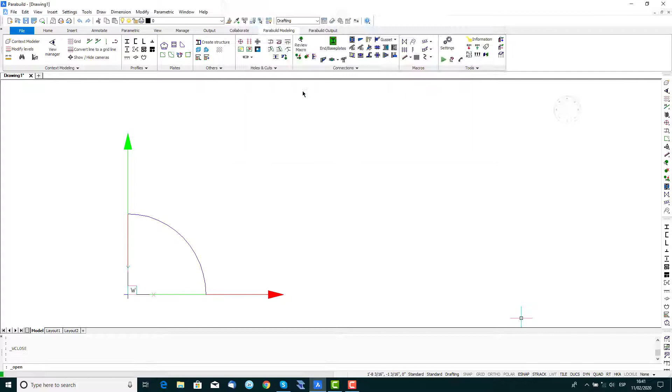In this exercise, we'll take a closer look at drawing, modifying and copying of larger macros such as bracings and trusses. Click on the Smart Copy icon and select one of the vertical bracing macros. When done, press Enter to confirm.

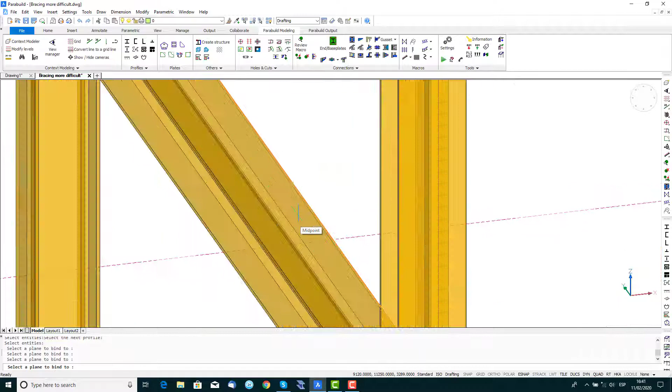Then, following the command line prompts, select two columns on the y-axis of the building, ensuring that one is a corner column. Then zoom in and select the top plane of the beam spanning between the columns by moving and clicking the mouse cursor until the plane is highlighted. When done, press Enter to accept the plane selection.

The bracing wasn't copied because the orientation of the two columns are rotated at 90 degrees relative to each other. To accommodate this situation, we need to redraw the bracing. Press the Escape key to cancel the Smart Copy command and click on the bracing icon. From the selection window, double-click Angles, opening the Fixing the Bracing dialog.

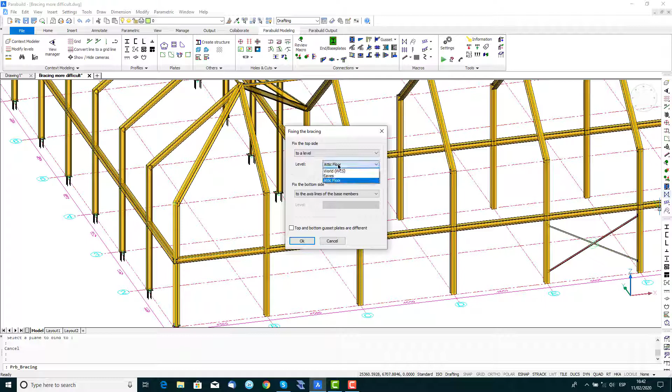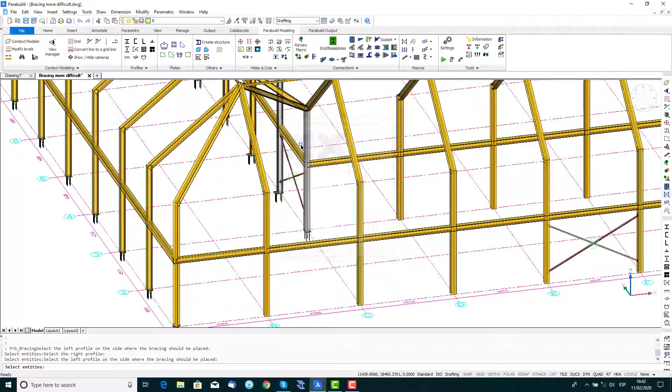And from the Fix the Topside drop-down, select To a Level, and then set the level to Attic Floor and click OK. Then, following the command line prompts, select the same two columns as before, first the left and then the right. From the gusset plate options, double-click on Rectangular Gusset Plate, and for the middle connection, double-click on Bolt and press Enter to confirm. Then close all the open dialogues.

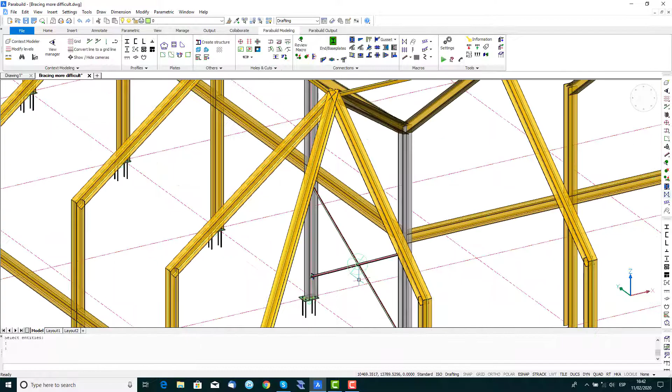Parabuild has automatically recognized that the two columns are orientated differently and has placed one set of gusset plates on the flange of the column and the other on the web. This is why the Smart Copy command for the other bracing didn't work. We'll now look at another bracing configuration.

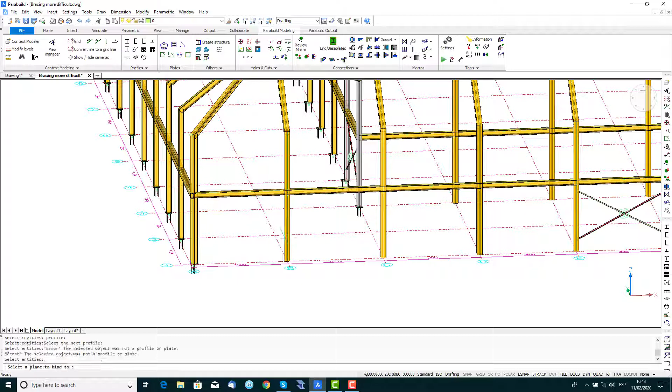Click on the Smart Copy icon again and click on the macro sphere of the same bracing we tried to copy before. Then press Enter. Now select two columns on the x-axis of the building, first the outside corner column and then the next. Then zoom in and select the top plane of the beam spanning the columns in the same manner as before and press Enter to confirm.

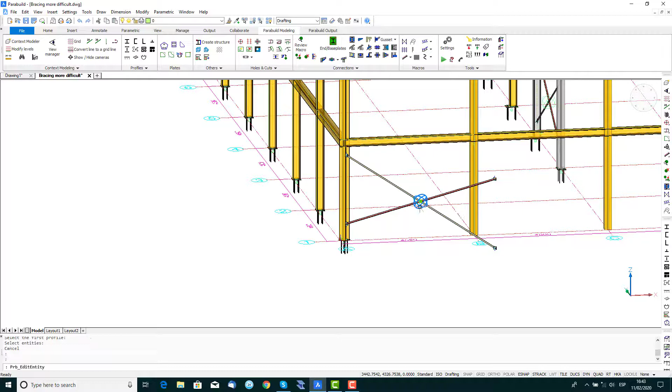The bracing looks peculiar because Parabuild always prefers to draw the bracing parallel to the first column that was selected. This is to avoid gusset plates welded at an angle. In the current situation, we have to draw the plates at an angle. So, press the Escape key to cancel the selection and double-click on the bracing macro sphere. And from the Edit dialog, activate the checkbox Allow Oblique Placement.

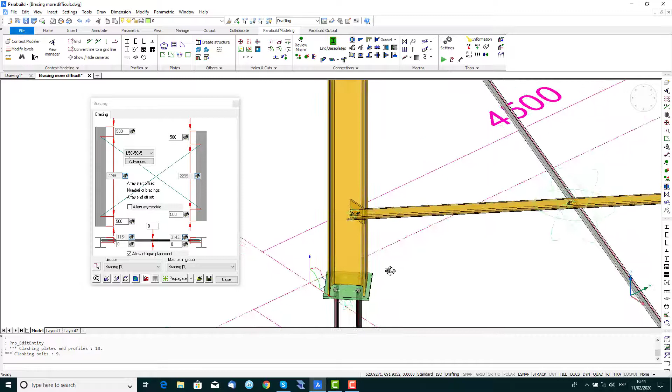The bracing is immediately squared, but there's an indication of a collision. The bracing member, connecting at the bottom of the column, is clashing with the inner column flange, while the top connection has an ungainly large gusset plate. The cutting routine in Parabuild, in this case, automatically draws the cut to the outer flange of the column instead of the web. This is easily corrected by moving the bracing.

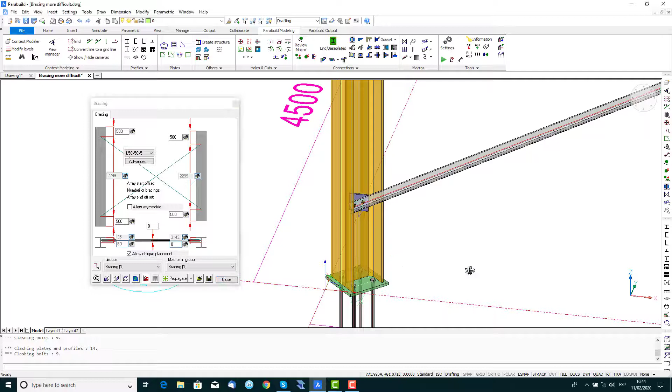Modify the displacement of the bracing on the left-hand side to 80. And thanks to the continuous collision checks during detailing, you can see in advance any issues that could cause erection problems.